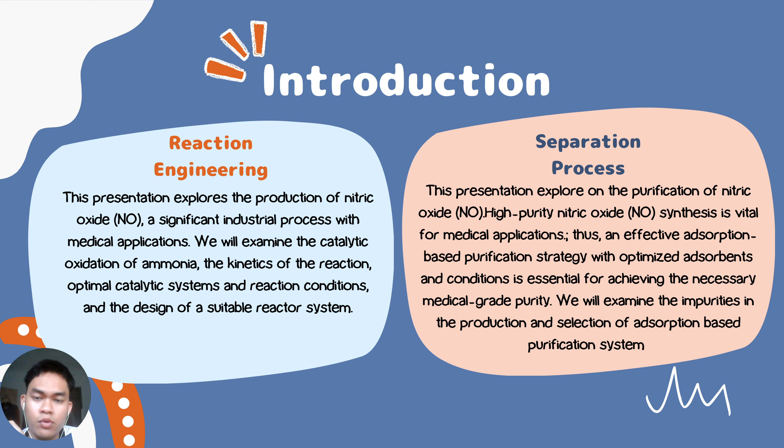The mixture then enters the plug flow reactor where the ammonia will react with oxygen to form nitric oxide, NO, and water vapor. The chemical equation for the reaction is 4NH3 + 5O2 → 4NO + 6H2O. There will also be a small amount of NO2 formed due to excess oxygen. The side reaction chemical equation is 2NO + O2 → 2NO2. The outcome is optimized NO production, which is essential for nitric acid manufacturing.

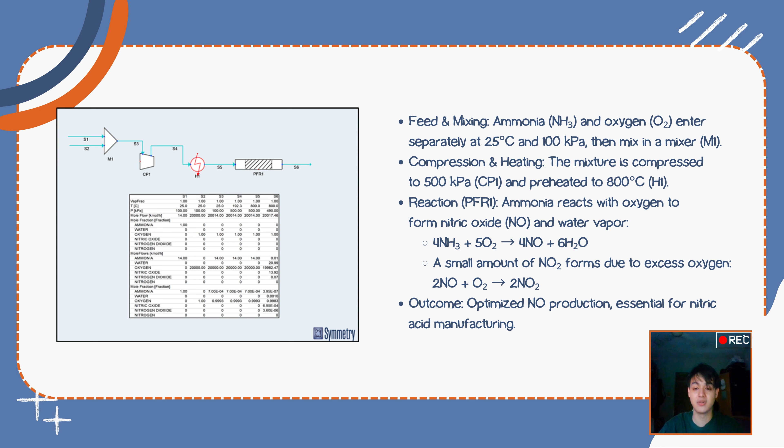So for the kinetics of ammonia oxidation, the primary reaction is 4NH3 + 5O2 converting to 4NO + 6H2O with a delta H of negative 1170 kJ per mole, at high temperature and with the help of a platinum-based catalyst, at 800 to 950 degrees Celsius and 1 to 10 atm, to achieve over 90% conversion efficiency.

And for the side reactions of the ammonia oxidation, we will have formation of nitrogen, N2, and nitrous oxide. These are unwanted products, and they can be controlled by optimizing the temperature and pressure.

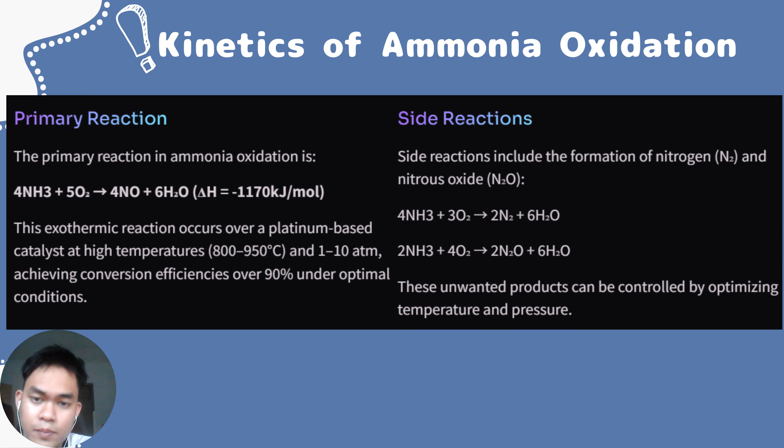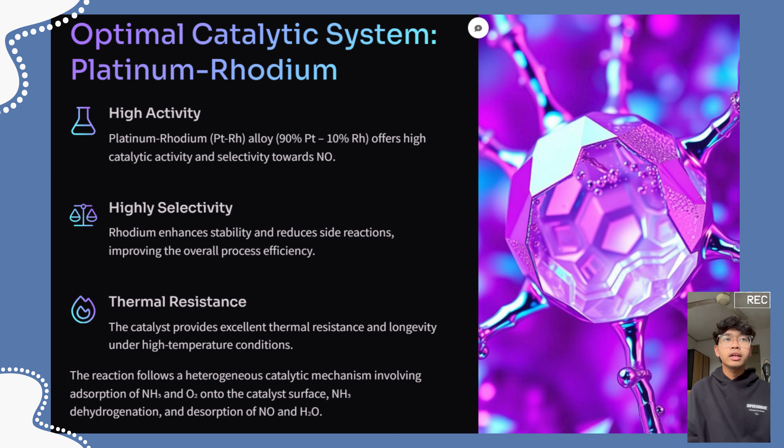Hi, my name is Muhammad Zafran and now I will be presenting the optimal catalytic system. The catalyst we use in our reaction is platinum rhodium due to high activity, high selectivity and thermal resistance. For high activity, the platinum rhodium alloy, 90% platinum and 10% rhodium, offers high catalytic activity and selectivity toward nitrogen oxide. Next, high selectivity. It reduces side reactions, improving the overall process efficiency. Next, thermal resistance. So, the reaction can begin in high temperature conditions.

Okay, next, optimal reaction conditions for nitrogen oxide production. The first one is optimal temperature. The optimal temperature is in the range of 700 to 800 degrees Celsius. Next, pressure. We need to use high pressure, that is 10 atm, leading to high NH3 ammonia conversion. Next, the oxygen to ammonia ratio is 1.2 to 1. The last one is residence time, between 0.26 millisecond and 0.262 millisecond.

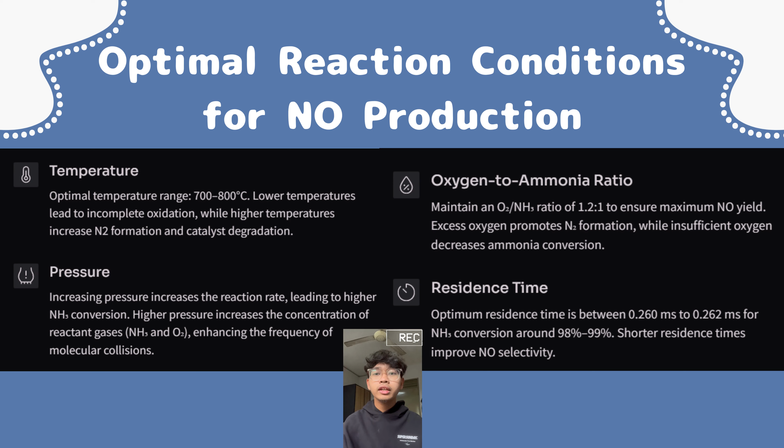Next, production capacity of the system. The initial ammonia molar flow rate is 14 kmol per hour. And the final conversion based on the simulation result is 99.93%. The final nitrogen oxide flow rate is 13.92 kmol per hour. And the estimated annual production capacity is

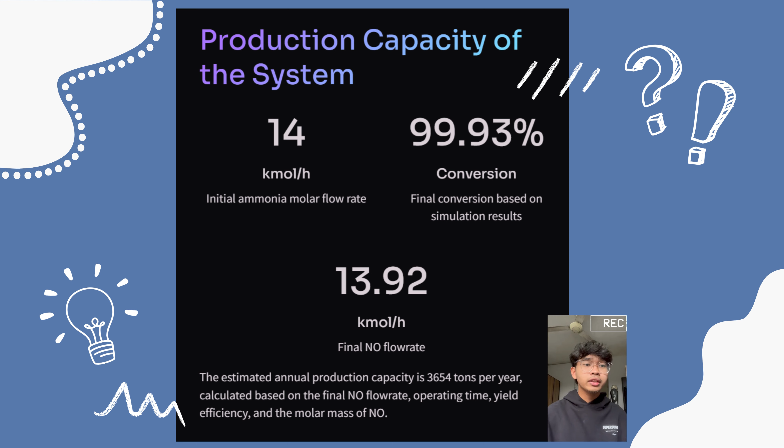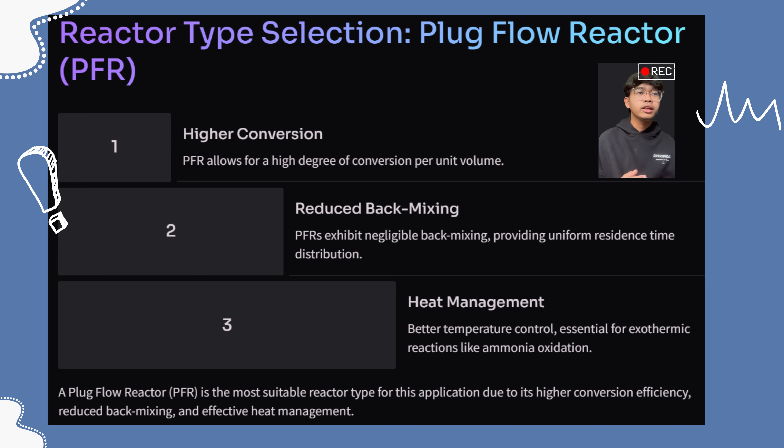3,654 tons per year. Okay, for the reactor type selection, we use a PFR, that is a plug flow reactor. The first reason is higher conversion. A PFR allows a high degree of conversion per unit volume compared to other reactors such as CSTR and PBR. Next, a PFR can reduce back mixing, so it can provide a uniform residence time distribution. The last one is heat management. This is essential because this reaction is exothermic.

Hi, I'm Awimin Halina and I'll be presenting the separation process part.

Identification of impurities. High purity of nitric oxide, NO, requires the removal of impurities that stem from raw materials, side reactions and environmental exposure. The most concerning contaminants, nitrogen dioxide, NO2, ammonia, NH3, and sulfur dioxide, SO2, pose risks to respiratory health and compromise NO stability.

Moisture and trace metals further contribute to unwanted reactions, leading to corrosion and chemical instability. Without effective purification, these impurities undermine the therapeutic efficiency of NO. A robust purification system is necessary to meet strict medical safety and quality standards.

Selection of adsorbent. Activated carbon was chosen as the primary adsorbent for its exceptional ability to capture impurities. With a large surface area and high porosity, it efficiently removes NO2, NH3 and SO2. Its strong affinity for polar gases ensures selective adsorption while allowing NO to pass through.

Additionally, activated carbon's chemical stability and recyclability make it a cost-effective solution, as it can be regenerated through thermal and pressure swing desorption. This combination of efficiency, reliability, and economic feasibility makes it an ideal choice for NO purification.

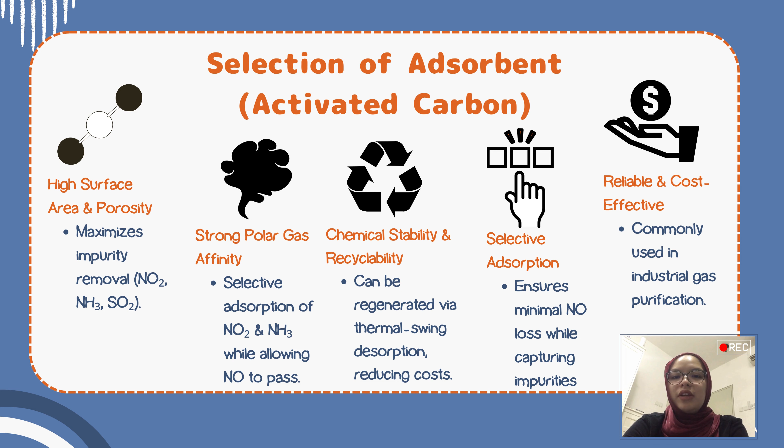Adsorption isotherm. Understanding the interaction between NO2 and activated carbon is key to optimizing the purification process. The Freundlich model was selected because activated carbon's heterogeneous surface supports multilayer adsorption. Experimental data confirm its effectiveness, yielding key parameters K equal to 0.619 and 1/n equal to 1.039,

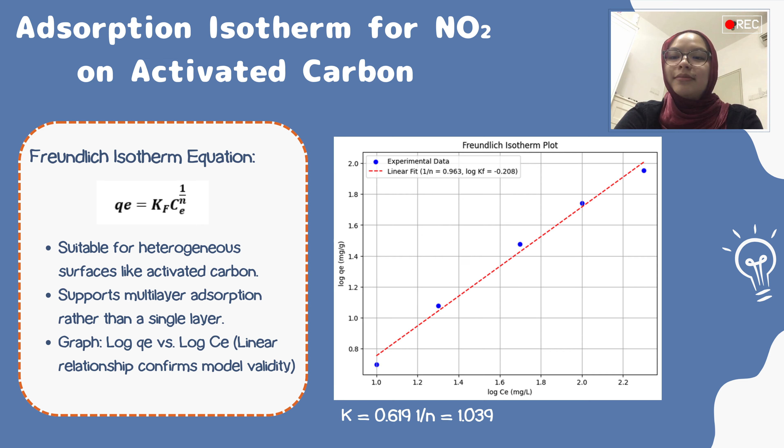Hello, I'm Zorin. Now I would like to present the design of the adsorption column. For our specific application, we decided to choose a fixed bed adsorption column. This selection is based on the fact that the fluid we're treating will pass through the packed bed at a steady flow rate. This allows for consistent and efficient contact between the fluid and adsorbent materials.

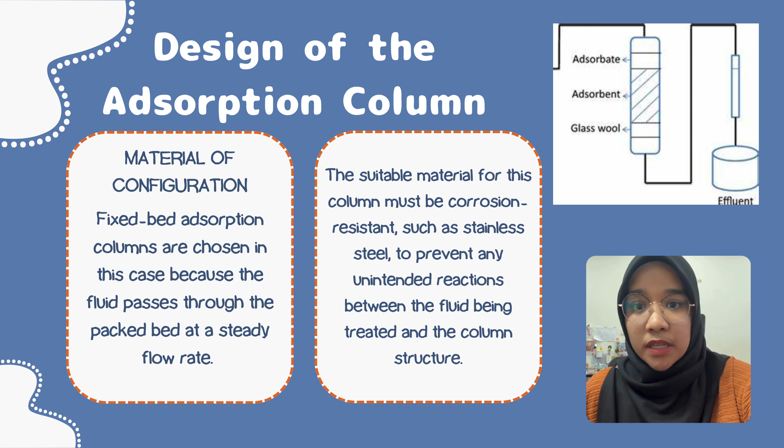To prevent any unwanted reaction between the fluid and the column structure, we need a material that is corrosion resistant. In this case, stainless steel is an excellent choice, ensuring the integrity and longevity of our adsorption system. Based on previous research, the suitable MTZ for activated carbon is approximately 0.8.

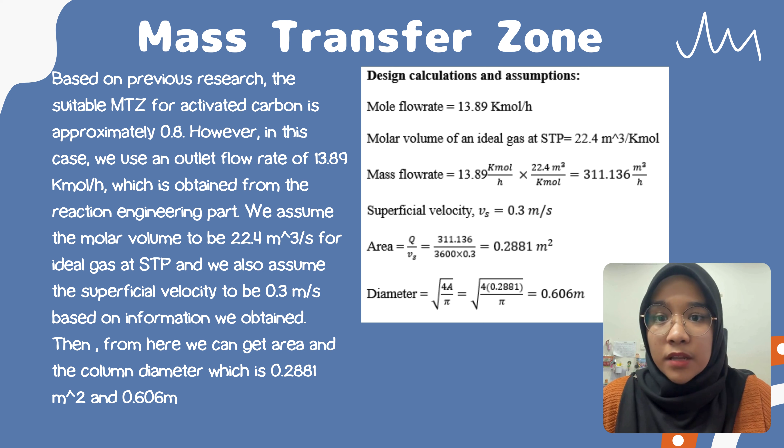However, in this case, we use an outlet flow rate of 13.89 kmol per hour, which is obtained from the reaction engineering part. We assume the molar volume to be 22.4 cubic meters for ideal gas at STP, and we also assume the superficial velocity to be 0.3 meter per second based on information we obtained. Then from here we can get the area and the column diameter, which are 0.2881 square meters and 0.606 meters.

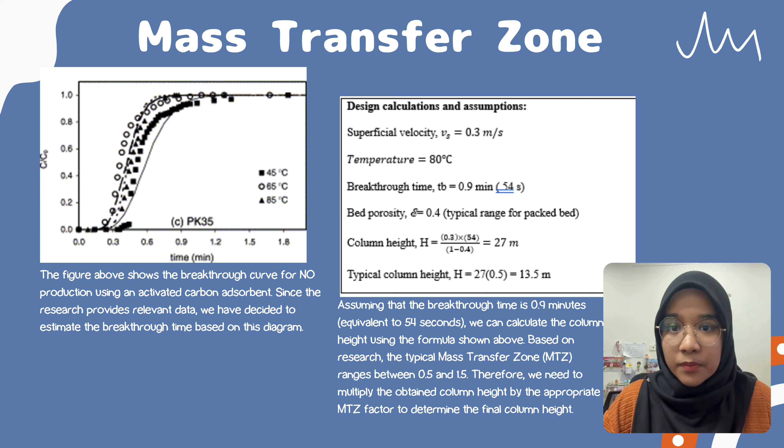the formula shown above. Based on research, the typical mass transfer zone, MTZ, ranges between 0.5 and 1.5. Therefore, we need to multiply the obtained column height by the appropriate MTZ factor to determine the final column height.

To further enhance our nitric oxide, NO, production process, we recommend focusing on optimizing the temperature swing adsorption, TSA, system within our purification stage. Specifically, we can improve NO production by maintaining high adsorption efficiency during the TSA process. This will directly lead to a higher purity of the NO delivered.

Ensuring the TSA process prevents structural degradation of the adsorbent. A stable adsorbent translates to consistent and reliable NO output over time. Focusing on the cost effectiveness and scalability of the TSA regeneration will allow for future expansion and increased NO

production capacity. Implementing non-chemical regeneration within the TSA system will help preserve the adsorbent integrity and ensure long-term stability of the NO production process. By implementing this recommendation, we can significantly improve the efficiency and output of our NO production.

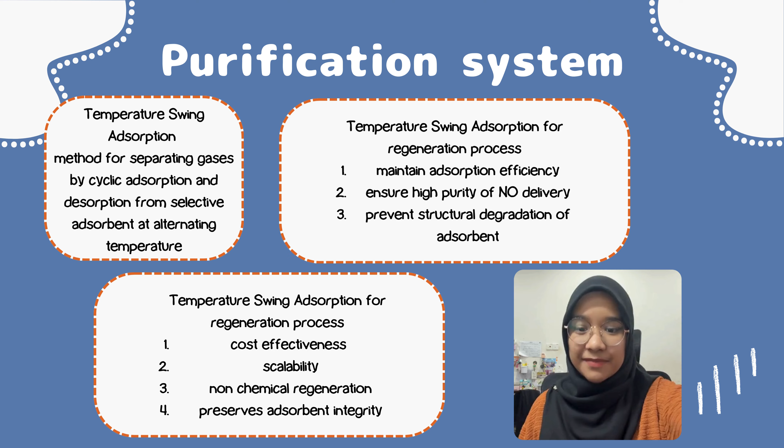So to conclude the presentation, in reaction engineering, we have explored the catalytic oxidation of ammonia to produce high purity nitric oxide. We have established an optimal reaction condition of around 800 to 950 degrees Celsius with a controlled pressure of 1 to 10 atm. And we are using the platinum-rhodium catalyst to achieve the production, which we target at approximately 3,600 metric tons of nitric oxide per year with a high conversion efficiency of 99%.

And for the separation process part, we have developed an effective adsorption-based purification system which utilizes activated carbon to remove traces of impurities like NO2, excess NH3 and SO2. We have also designed the fixed bed adsorption column with temperature swing adsorption for efficient regeneration. And we have ensured continuous operation while maintaining the adsorbent integrity.